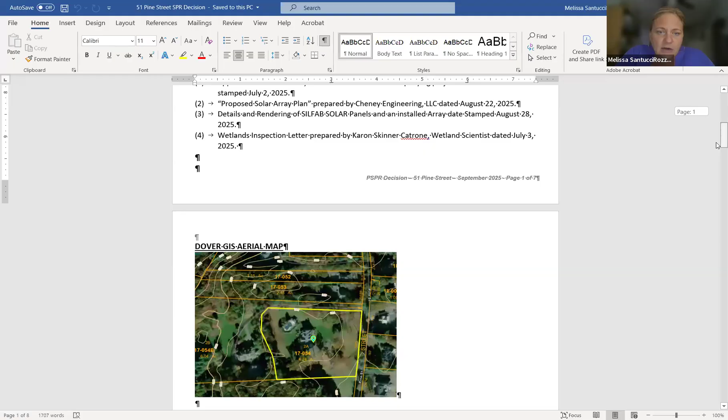So what we have here tonight, members of the board, is an application for a medium scale ground installation at 51 Pine Street. I've been working with Artie Crocker, the vendor on this application, for the Whiteley family. They're interested in mounting 68 ground-mount solar panels in the front yard. I have an aerial photo here on the screen, and if you can see my cursor, the array is going in this area of trees in the front yard.

This shows it a little bit better here. Let me blow up my screen so we can zoom in. I hope everyone can see that. Where my cursor is, we see the array is proposed perpendicular to Pine Street, running the long way into the property. And then you can see the electrical connections leading back up to the main house.

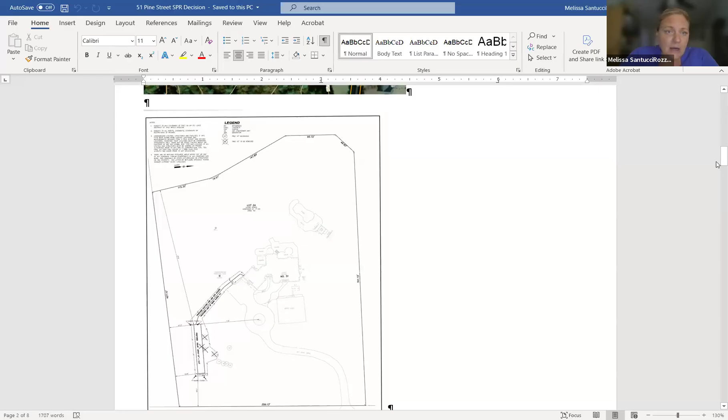This report was a little more lengthy and detailed, taking into account regulations for solar array installation, which I've included here for the planning board. They've provided most of the information. I think one of the things that's outstanding is landscaping, and I know the property owner has desires to do some landscaping, and we have some desires to have screening and buffering of the array, noting that 4 trees will be removed as part of this installation.

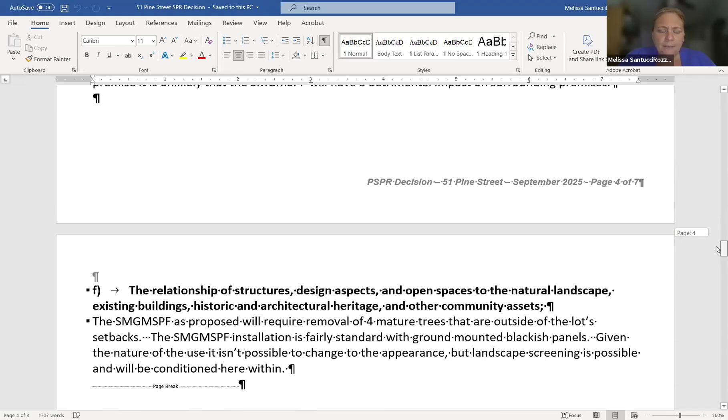There's no concerns about parking. There's no concerns about traffic increases or circulation. This is accessory to the main use of the property, which is a single family dwelling. And really getting into, I wouldn't say concern, but the main focus of the report here is in fact the conditions and the decision.

Carol, I'm not sure if you want to hear from the applicant and then I can close with that material. Right, let's open it up for discussion amongst all of us, including the applicant and the engineer, and then we'll get to the conditions. So, Artie, thank you Melissa for that review. Artie, do you have anything to add that would help us in understanding the project? Or Tom? I don't believe there's too much more I can add.

As per Melissa's request and the requirement of Dover, we supplied a fairly in-depth analysis of what the array was going to be, the height of the array, the position of it, the affected surface taken up by the array, and the pathway back to the house. We're certainly here to do whatever we need to do to abide by the Dover regulations.

I live next door in Needham. I'm the chair of the planning board in Needham and used to be on the Conservation Commission, so I'm well aware that we do what's right and try to make it as complete as possible before even getting to this point. Whatever questions you have, I am here to help answer.

Thank you, Artie, you are ready for us. Which hat do you have on tonight? Yeah, trust me, I have another meeting going on, I have to go right after. Okay, we'll make this as quick as we can for you.

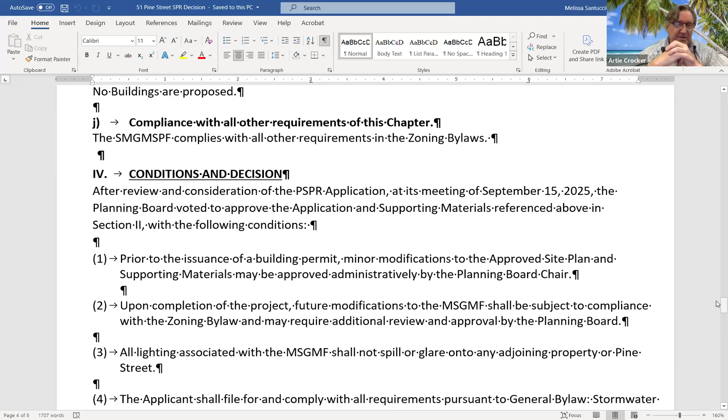The construction of the array itself and all the electrical diagrams are always required, especially for something like this and for everything related to solar. Yep, and it is connected to the grid. Right, thank you. So are there any questions from any of the planning board members?

I just had a question. I saw the abutter list, thank you for including that, Melissa. Have any abutters raised questions to the office or anything of that nature? Yes, Jody, I did have the property owner at 50 Pine across the street come by the office late in the day today. Went over the plans with him. He was voicing concerns about the previous owner, Mr. Paradise, who did some substantial tree removal at that particular location.

The abutter also had questions about the scenic road, and we talked briefly about the difference between the scenic road versus removal on the lot. We also shared with him our concerns about screening and buffering, and that we were going to be conditioning a landscaping plan to be submitted prior to the start of work. Thank you.

Any other comments or questions from planning board members? Okay, in that case, I'm going to make a motion—would somebody please make a motion to approve the conditions and decisions in this document, preliminary site plan review approval decision dated today? I'll make a motion. I'd like to make a motion to approve the preliminary site plan review approval decision dated today. Is that enough? That's great. And do I hear a second? A second. Great, thank you, Katie.

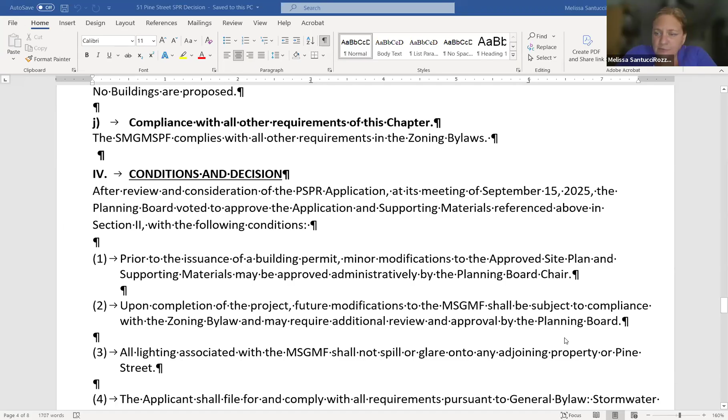So Melissa, would you read the motion, please? Yes. After review and consideration of the preliminary site plan review application in its meeting of September 15th, the planning board voted to approve the application and supporting materials referenced above in section 2, with the following conditions. Condition 1: prior to the issuance of a building permit, minor modifications to the approved site plan and supporting materials may be approved administratively by the planning board chair.

Condition 2: upon completion of the project, future modifications to the MSGMF (medium solar ground mount) shall be subject to compliance with the zoning bylaw and may require additional review and approval by the planning board. All lighting associated with the MSGMF shall not spill or glare onto adjoining property or to Pine Street. Not sure if there's some security lighting or something like that that's needed, but nonetheless we don't want Artie shaking his head no.

The applicant shall file for and comply with all requirements pursuant to the general bylaw, stormwater management and erosion control, chapter 159, as required by the Department of Public Works, including all project review by the town engineer.

Prior to the start of any on-site work, the applicant shall mark the 4 trees shown on the plan to be removed. The town planner will conduct a site visit to ensure the trees that are marked are consistent with the approved plans. Pursuant to regulations 247-5, prior to the start of any on-site work, the applicant shall provide proof of liability insurance.

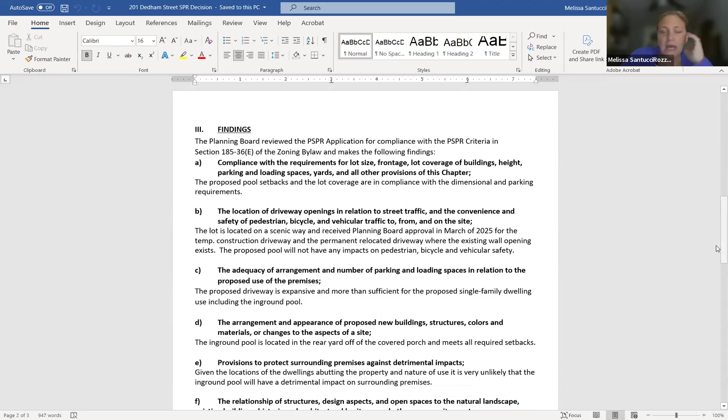Parking is not an issue; the driveway is very expansive. The pool is to the rear of the house and the rear yard, a logical location. Again, not concerned with detriments to the surrounding area. The pool design is taking advantage of the existing topography with some very nice grading. I consider it pretty well designed and somewhat natural. I'm assuming there will be some landscaping going on post-construction. Not overly concerned with the location of the pool per se, but just in general, there's really not much impact to the surrounding area, in my opinion. And then we do have our boilerplate conditions on this one for the members.

Okay, thank you for that, Melissa. Mr. King, do you have anything to add? It's a pretty basic gunite pool. It will have an auto cover as well as being fenced in. It's pretty far away from the neighbors. The lighting will be very muted and understated, nothing crazy or anything like that. Just a very typical rectangle pool that we do in town.

Okay, thank you. Planning board members, any questions? None for me, thank you. No, Val? No, none for me, thank you. Okay, I have none as well.

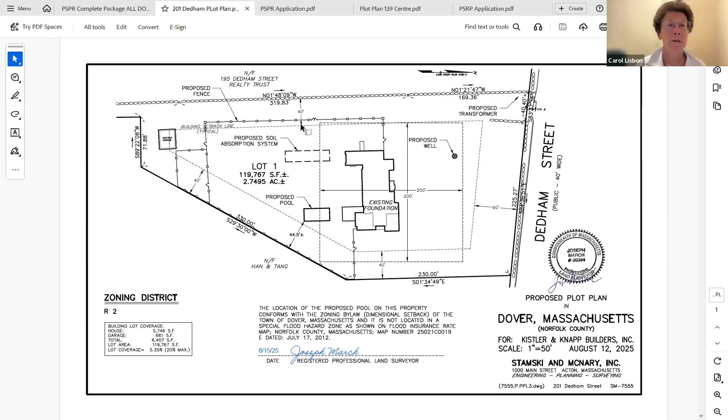Okay, well, thanks for showing me this. Okay, my apologies again, but thank you for coming on. Thank you. Okay, so with that, we will now move on. Let me get rid of these questions. Okay, we have no attendees left. Okay, great.

When we were going to 139, correct? 139, yes, Centre Street? Yep.

Okay, members of the board, tonight we have our third application, also Mr. King's application with environmental pools at 139 Centre Street. This property is undergoing a full rebuild. The lot was purchased recently by the Betancourt family. This particular pool is 20 by 40 in ground, same gunite auto cover, and it's going to be located to the rear of the structure as well.

The findings again are pretty straightforward. There's no concerns about coverage. This one is in fact also located on a scenic way. There is no proposed alteration along the frontage.

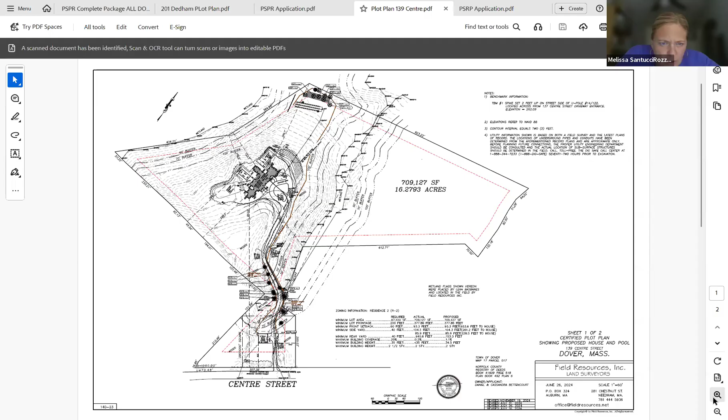Let me zoom in a little bit. So you can see here the limited clearing. You can see still the tree line and the limited clearing with some minor grading. But again, very, very large property and really kind of just using sort of that knoll, I guess. There's a substantial topography changes here to put the new house in. Nice big house, and then they have the pool and the sports court for the kids.

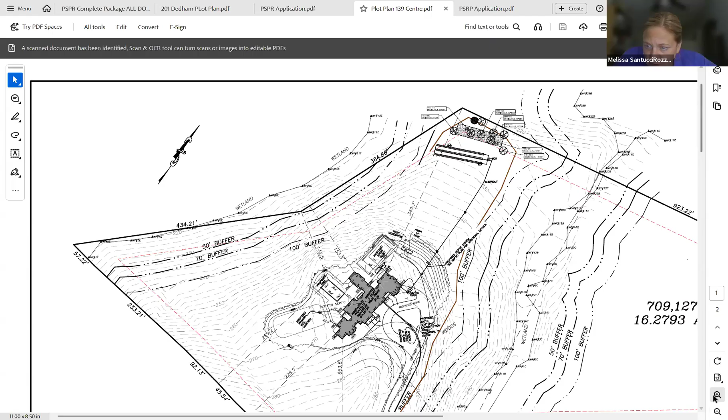So Melissa, could you show us where the fencing is going to be? Yep, let me zoom in a little bit further. The fencing on this one is -- can you see my cursor when I use the cursor or no? Yes, yep. Okay, perfect. So I'm at the corner, one of the corners of the house. The house has got a couple corners. So they're gonna have the fence come right off the back of the house. This is sort of, again, taking advantage of the cleared area and topography. And the fence is coming around the pool projection, just like this, and tying right back into the house.

So in this particular case, they don't have much of an improved yard. They're going to have the pool area, which will be very nice, and then they'll have the sports area, but not a situation where they're fencing in the whole entire yard to meet the fence requirements for the pool. Okay, thank you.

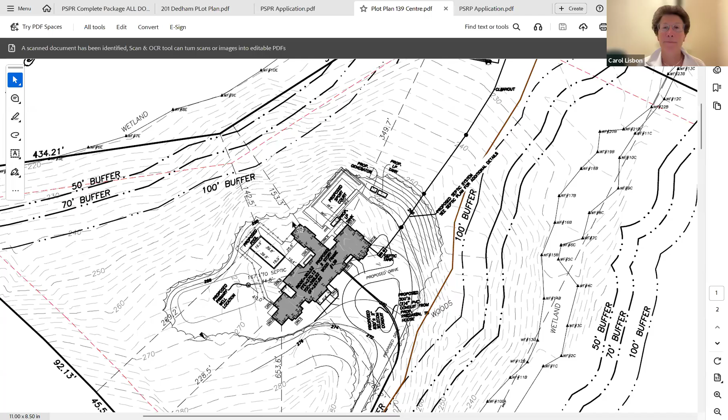Any further questions? In that case, we could go back to the decision.

There we go. And Jody, would you like to make a motion, please? I'd like to make a motion to approve the preliminary site plan review application for -- did you say 139? 139, I'm not seeing it on the screen, I lost what Centre Street we're on. 139, 139 Centre Street, and the accompanying application that's been discussed this evening, September 15th. Do I hear a second? Second. Thank you, Val.

And the conditions this evening, very similar to the last one. Keep it consistent for Mr. King. After review and consideration of the preliminary site plan review application at its meeting of September 15th, 2025, the planning board voted to approve the application and supporting materials referenced above in section 2 with the following conditions.

Prior to the issuance of a building permit, minor modifications to the approved site plan and supporting materials may be approved administratively by the planning board. Condition 2: upon completion of the project, future modifications to the in-ground pool shall be subject to compliance with the zoning bylaw and may require additional review and approval by the planning board.